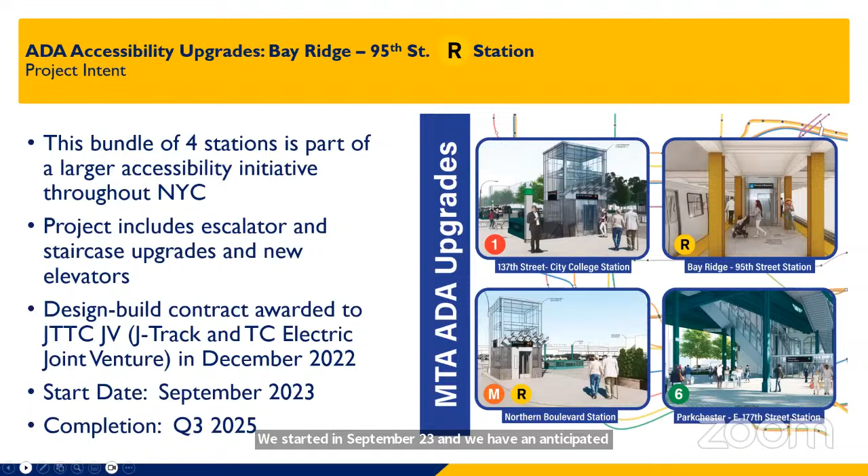The 95th Street R station is the final stop on the R line in Brooklyn. It's located at the intersection of 95th Street and 4th Avenue, an underground station with 1 island platform that has 2 tracks and staircases for access to and from the street.

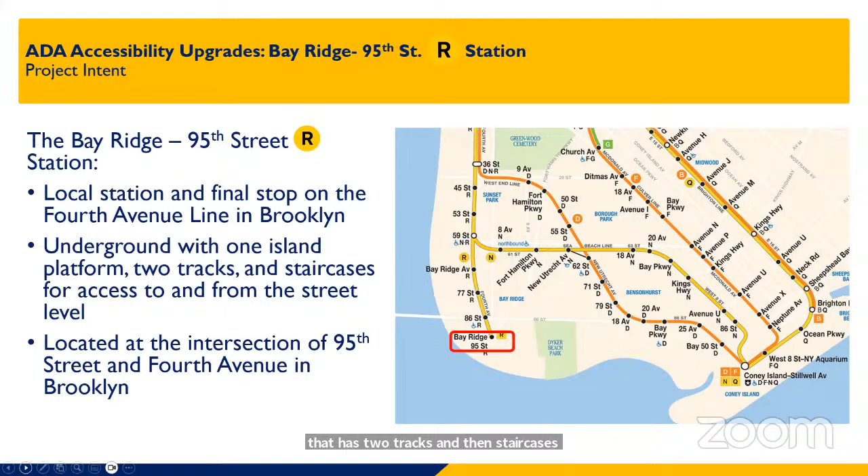The scope of the project: we are installing 2 elevators, one from the street to the mezzanine level, and one from the mezzanine level to the platform. There will be ADA compliant staircases with ADA compliant railings, an ADA compliant platform and boarding areas. We'll have an ADA compliant restroom for public use, and ADA compliant sidewalk ramps at the station entrance intersections. This is a rendering of what the elevator kiosk will look like on the street level.

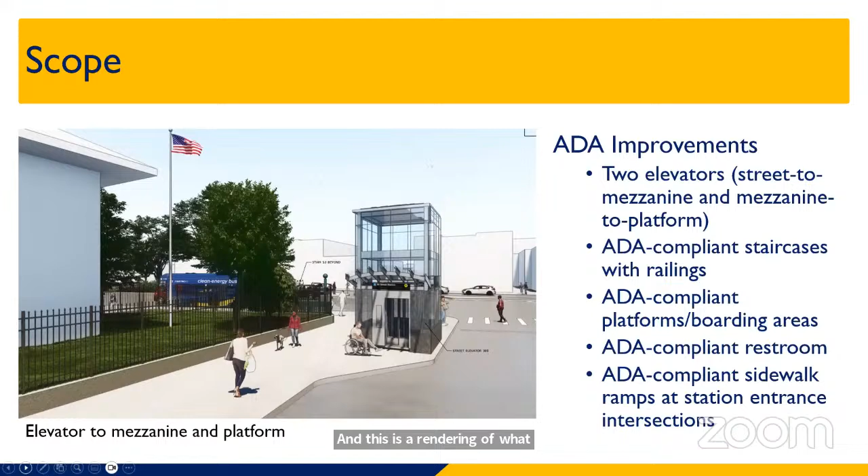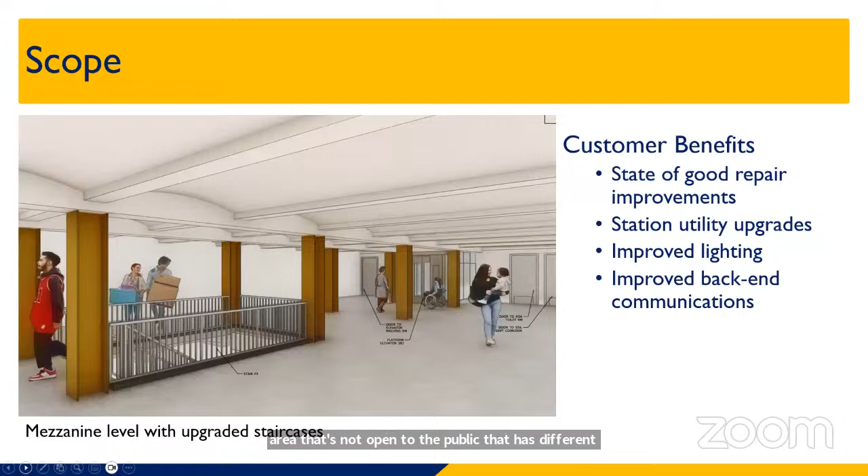Also, customer benefits that come with the project: we're making some state of good repair improvements, station utility upgrades, improved lighting, and improved back-end communications for signals. Underneath we have a pretty big area not open to the public that has different rooms for signals and communications, so we're doing some work back there while we're in the station.

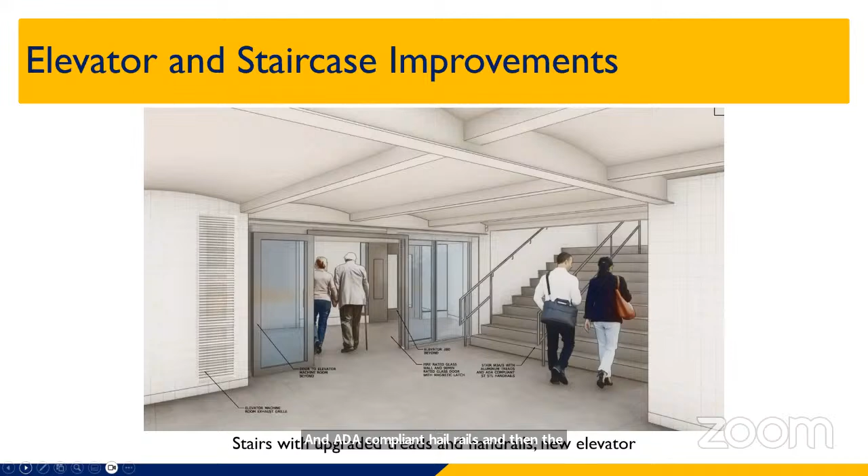The elevator and staircase improvements - the stairs will be upgraded with treads and ADA compliant handrails, along with the new elevator, and ADA compliant boarding areas with the warning panels and the rubbing boards.

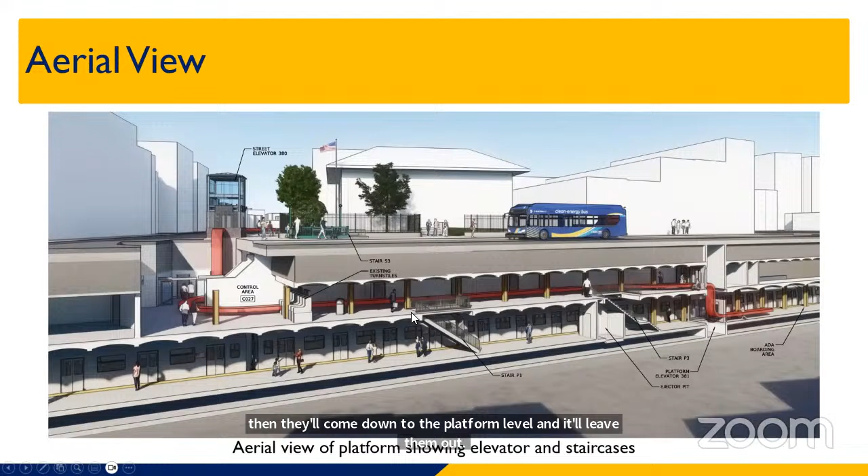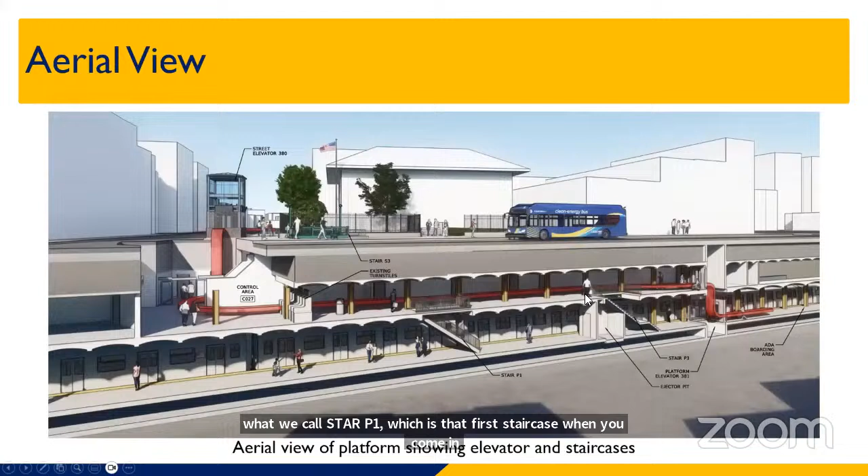We also did work on what we call stair P1, the first staircase when you come in through the fare control area and paid area down to the platform. And this is stair P3, the second staircase in the station that also leads down to the platform.

As we mentioned, we mobilized in September 2023, and some of our anticipated goals for completion are spring 2025 for the street to mezzanine elevator, and also spring 2025 for the mezzanine to platform elevator. We have the two staircases: the mezzanine to platform staircase was completed in May of this year and is open for use, and we're working on the street to mezzanine staircase, which we anticipate opening to service in early 2025.

There were some service impacts during the project. We had weekend service diversions where we ran shuttle buses to the closed stations. We also had other work going on in the R line, so we took advantage of that. We had staircase closures while we were working on those, and we have barricades in place for safety at street level, and signage up at the station.

We also had a temporary loss of parking while we did the work, and sidewalk and travel lane closures. We've been maintaining access to businesses during this time, and the dates of when we close the street and the parking are communicated in advance.

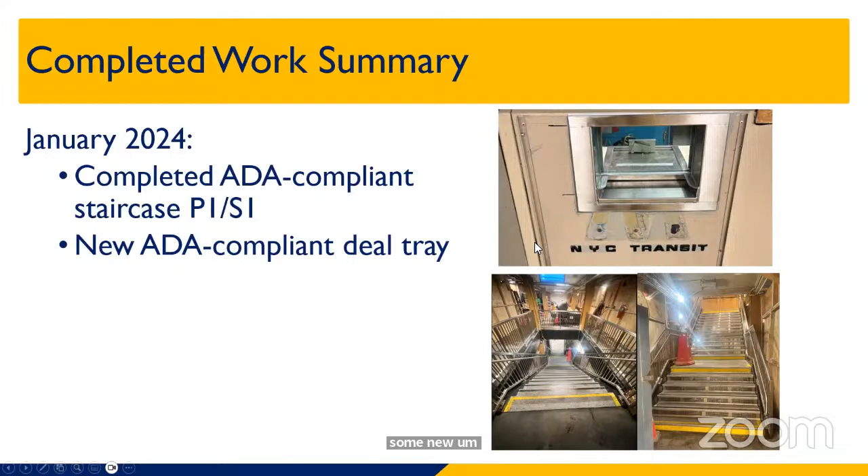So the completed work so far: in January 2024, we completed staircase P1, the first staircase in the fare control area down to the platform. We also have new ADA compliant deal tray for the token booth at the station.

April 2024, we completed the walls for the elevator machine rooms and the janitor's closet, and we're also working on the ADA compliant public restroom.

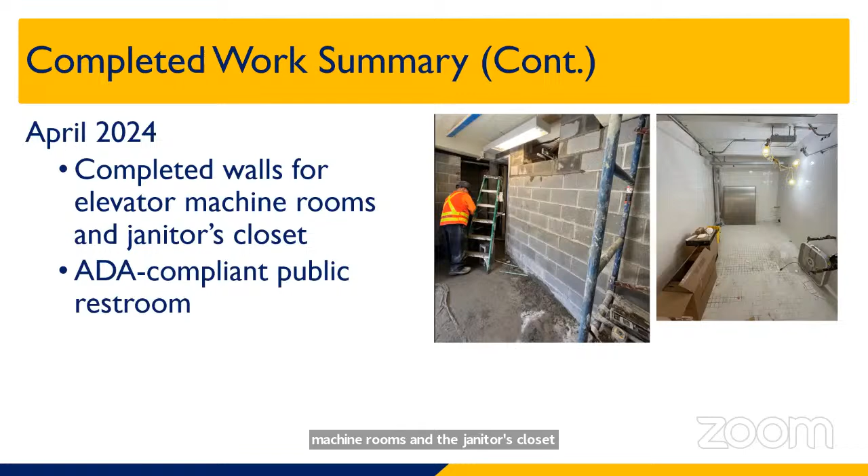In May 2024, we completed the ADA compliant staircase from the mezzanine to the platform.

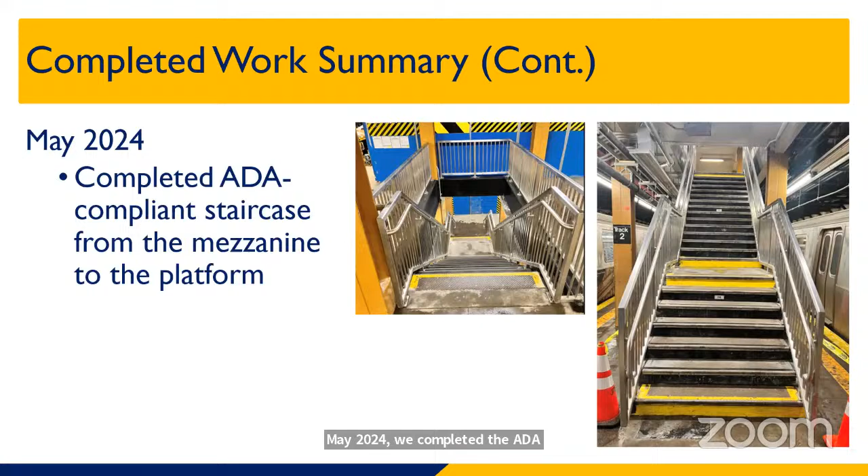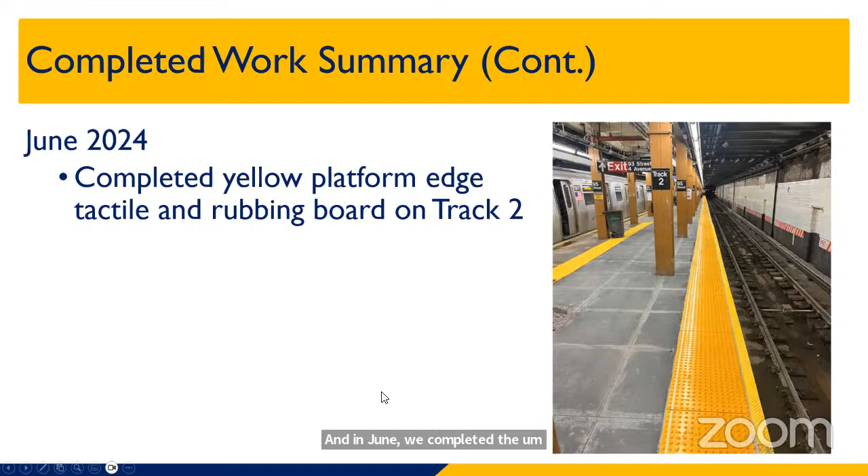In June, we completed the platform edge tactile and the rubbing board on what we call track 2. And this July, we completed the elevator shaft for what we call elevator 381, which is the elevator that will take people from the mezzanine to the platform level.

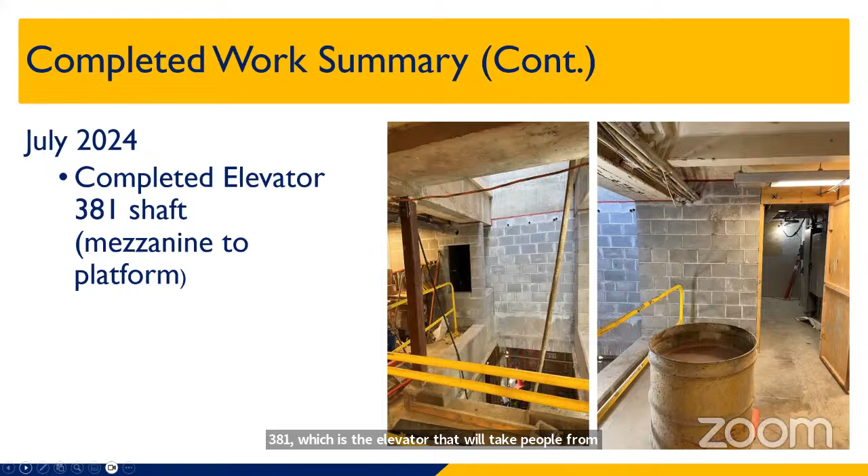So there's a picture there of the work that's been ongoing. In August, we completed the platform tactile edge and rubbing boards on track 1.

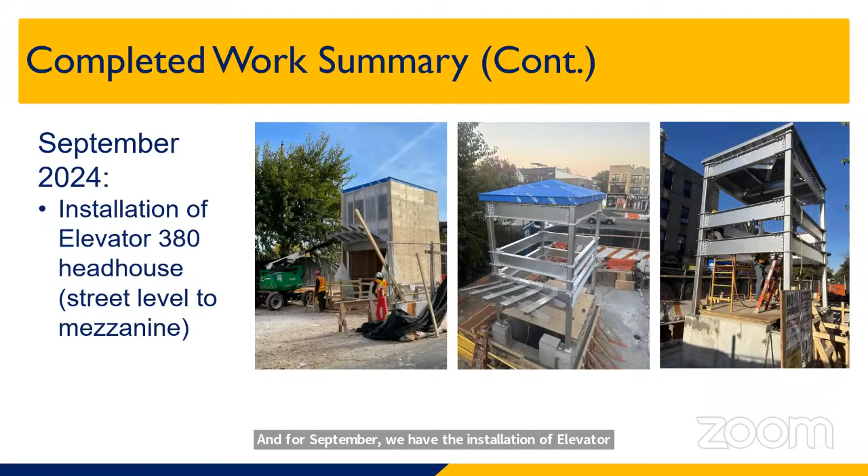And for September, we have the installation of elevator 380's head house, which is the street to mezzanine level elevator housing. We have some pretty good pictures there without a barricade in your way.

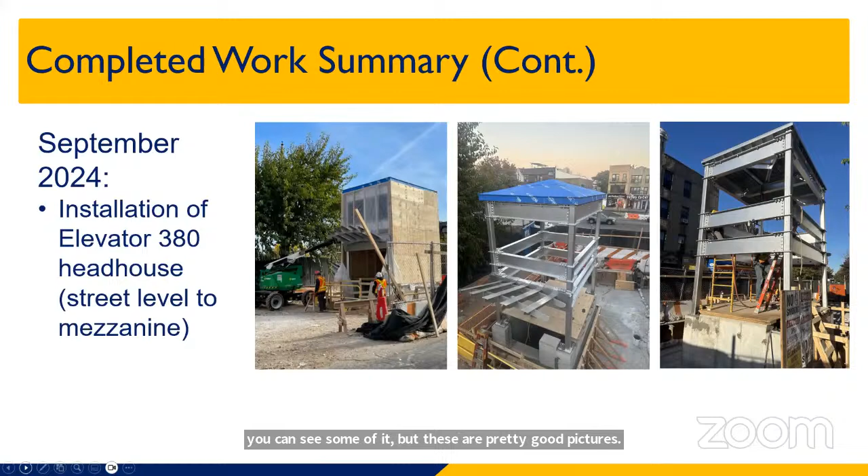We have ongoing work for both elevators, including installing the concrete for the roof slabs, the elevator shaft, demolition and restoration of the sidewalk area, installation of the platform safety railings, and building and installing the substructure. We'll also have final testing processes for both elevators, and we anticipate opening to service for the public in spring of 2025. We'll keep you posted as we get close to that date.

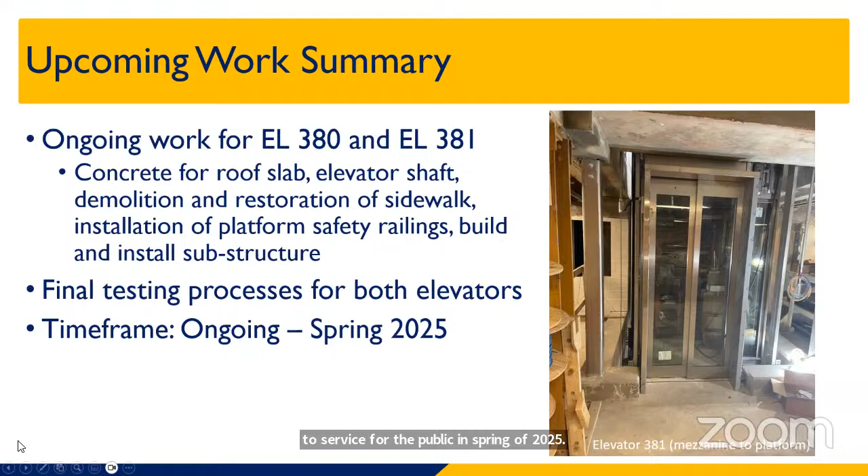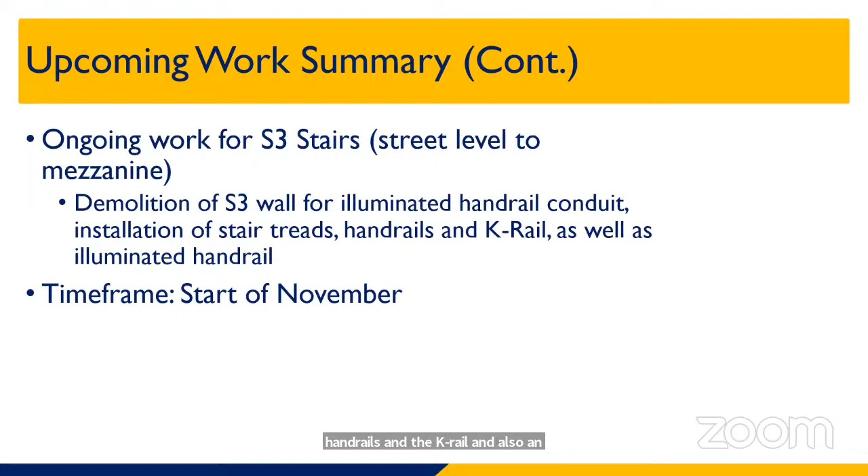We also have ongoing work for the street stair, that's stair S3. We had demolition of the walls for an illuminated handrail conduit, installation of stair treads, handrails, and the K-rail, and also an illuminated handrail. We're planning to start that work next month.

We also have general orders, which are the service diversions, communicated in advance with posters. This week on the overnights, we had work that required the R to be short lined, running between 95th Street and 59th Street, single tracking on the northbound track. Notification was put out for that. At 5 a.m. service is back for the morning, and we had signs posted for visibility for the nearby businesses.

We can take some questions and comments now. I'm happy to unshare my screen, or leave it up if somebody wants me to go back to any of the renderings or drawings.

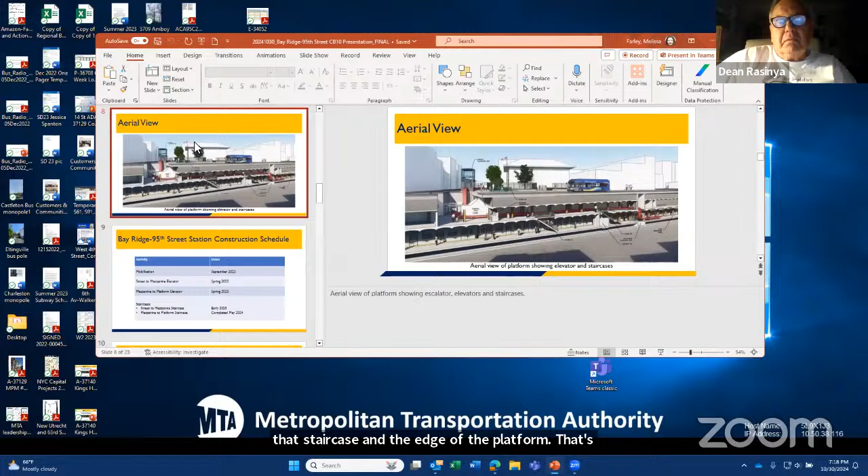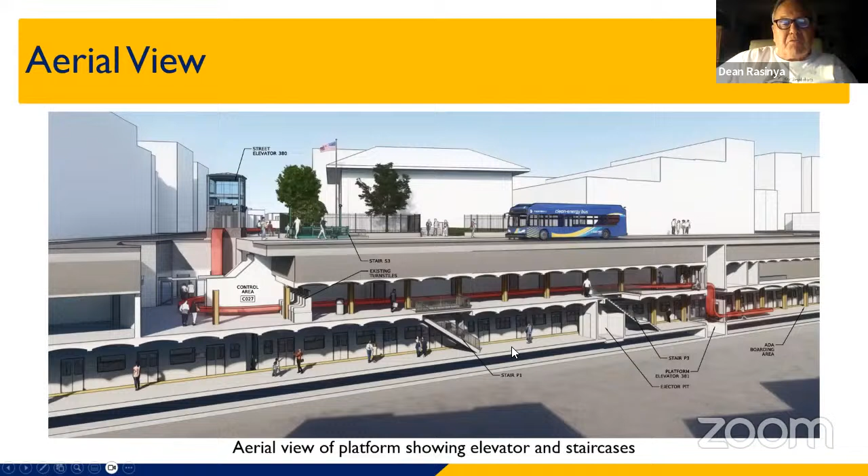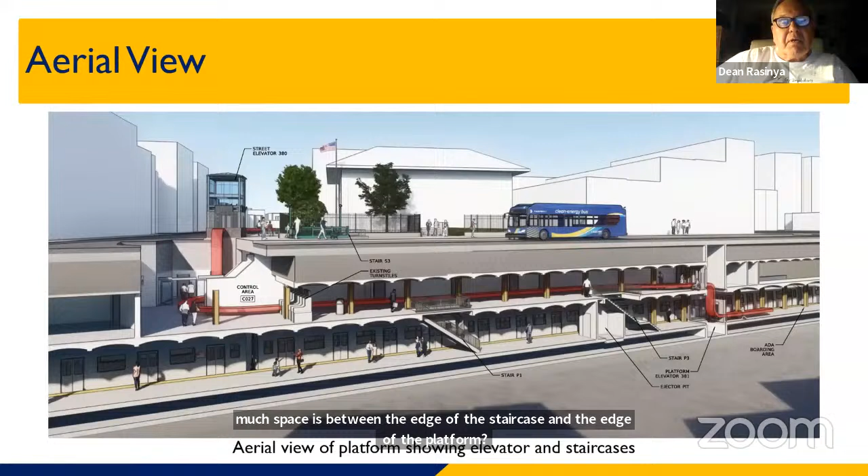Melissa, you're speaking but we can't hear you. Sorry, I was muted. Hassam, do you have that width? Excuse me, which area exactly are you talking about? I'm speaking about the platform where passengers have to traverse from one end to the other to get to the elevator. In doing that, they have to pass by a staircase - how much space is between the edge of the staircase and the edge of the platform? That's my first question. The minimum per the standards is 5 feet.

We're already providing it, it's available right there, this is what we have existing. One clarifying question - does the 5 feet include the yellow border rubber area, as you call it? Yes, including that. And second, from this chart, within the red line, I don't think we need to pass through a staircase, or am I reading this incorrectly?

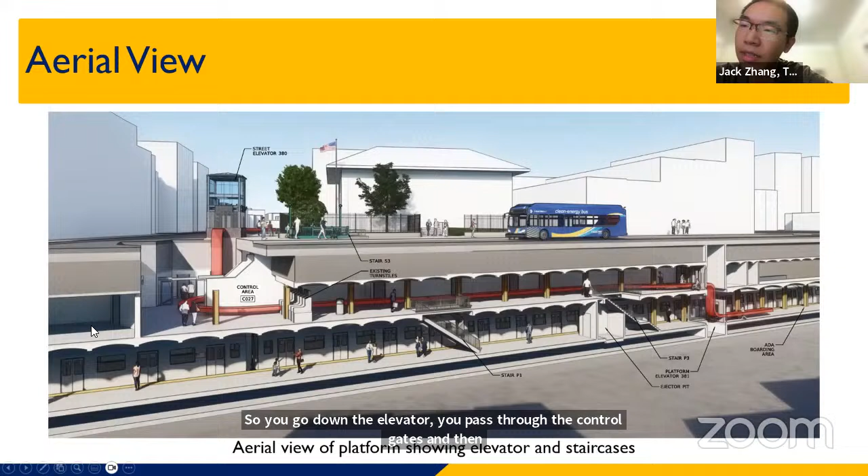So you go down the elevator, pass through the control gate, and within that platform area there's no staircase to pass through because we're on the mezzanine, then you go to the elevator and get down. Is that correct? At 95th Street, it's a middle island platform, so it's a little tight - this is the reason it's maybe tight from both sides, in the existing condition.

Yeah, I think you're correct Jack, that if it's somebody in a wheelchair or with a walker, when they're passing through the mezzanine level to the elevator and down, the pathway they would take would be to that ADA boarding area. We still have a 5-foot clearance, which is a typical ADA clearance, even up on the street - that's what DOT requires behind a shelter, that kind of thing. But if anybody is trying to board using the ADA elevator and that area, they would not be passing the staircase that way. They would board the train where they know they can get off and get on and get to the elevator.

But we can confirm the 5 feet. Okay, for Dean, you and Dean. My concern with that specifically, Melissa, is this.

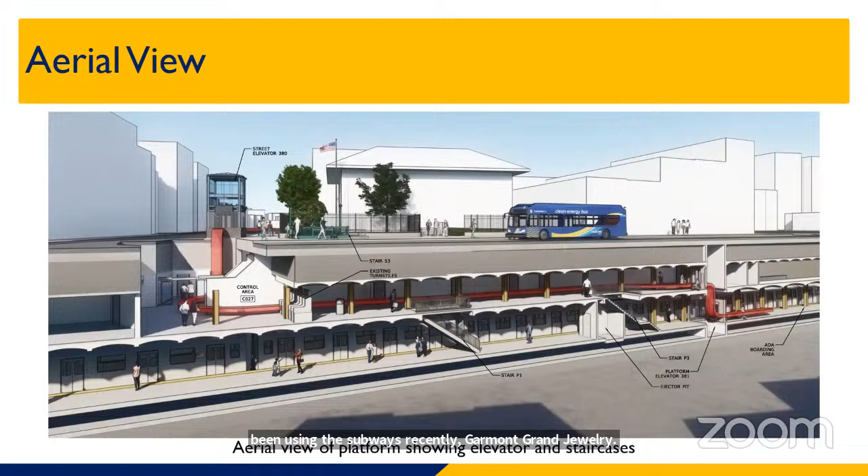I've been using the subways recently, Garmont Grand Jewelry, and I would say almost every staircase there's people that hang on the rail between the edge of the platform and the railing, which really narrows the amount of space a person has. I find even with myself, I wind up very close to the edge of the platform when I'm walking by there. So is there something we can work at preventing people from standing and hanging on those rails and forcing people out closer to the edge of the platform?

You know what, Dean, let me bring that back, because that's probably a system-wide concern. I understand what you're talking about, and as Hassam said, because this is an island platform, some of those island platforms are a little bit narrow. There's not much we could do with the platform because of the track, but I can ask about the staircase in general and those railings to try to keep people away from standing there and blocking that pathway.

He's asking all over the city. Even something as simple as having signs on there, do not stand, sit here, maybe that'll prevent some people from doing it. All right, yeah, sure, we'll bring that back and see if there's any initiatives that they might be interested in doing for that.

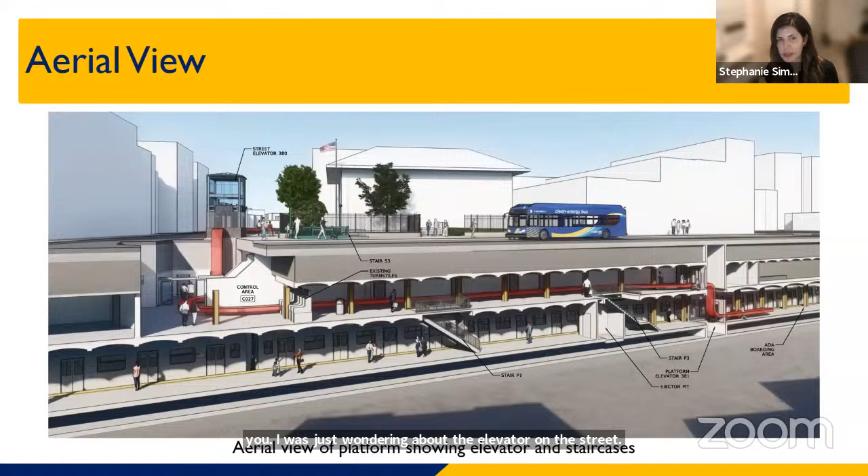All right, I see just one more hand. If there's anyone in the room that has a question, feel free to raise your hand in the meantime. Stephanie, we'll go to you. Thank you, I was just wondering about the elevator on the street side. By how many feet have you extended the sidewalk into the street in order to accommodate the elevator?

Going to toss that to you, Hassam. Approximately 10 feet out of the old curb. So the street itself then for cars has been reduced by 10... Yes, this was the agreement from the beginning. We are going to reduce the car lanes, and we got permission from DOT before we started the construction work, so we have to get this space to do our elevator.

Because we have to keep a passageway between the library curb and the new elevator. This is something that's not uncommon at other stations we have, due to the station configuration and where we could put the elevator. So we do understand that any loss of street space is a concern, but we hope the elevator is a plus too for everybody.

I was just wondering two things regarding that. Please remind me again, the entrance to the elevator on the street, and then in terms of visibility for cars that are driving — I believe that street goes towards 4th Avenue, east — when the car approaches, do they have visibility to the left? Does the elevator obscure drivers' visibility?

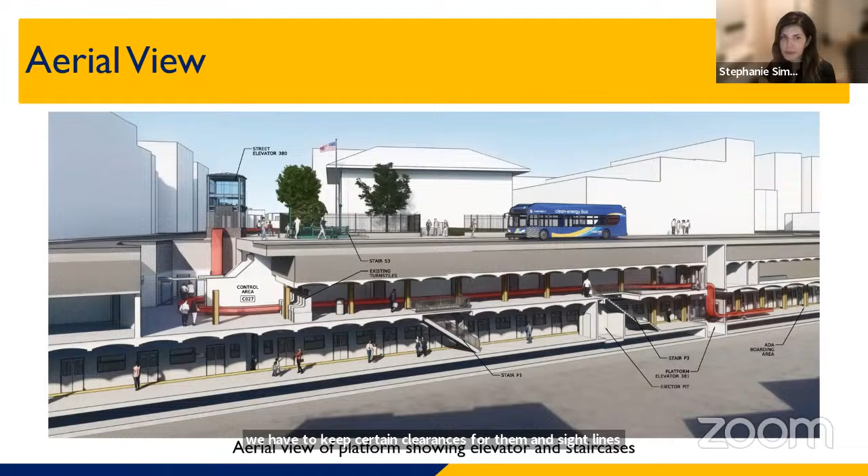It shouldn't right up to the corner because we have to plan this with DOT, so we have to keep certain clearances for them and sight lines. Okay, so we can check on that, what their requirements are.

Yes, Stephanie, there are standards for DOT for the vision for car drivers. We are already providing it. The elevator is a little bit back on the side of 95th Street, not on the side of 4th Avenue, to keep the traffic visible. The DOT cares about this kind of stuff. Okay, thank you very much. You're welcome.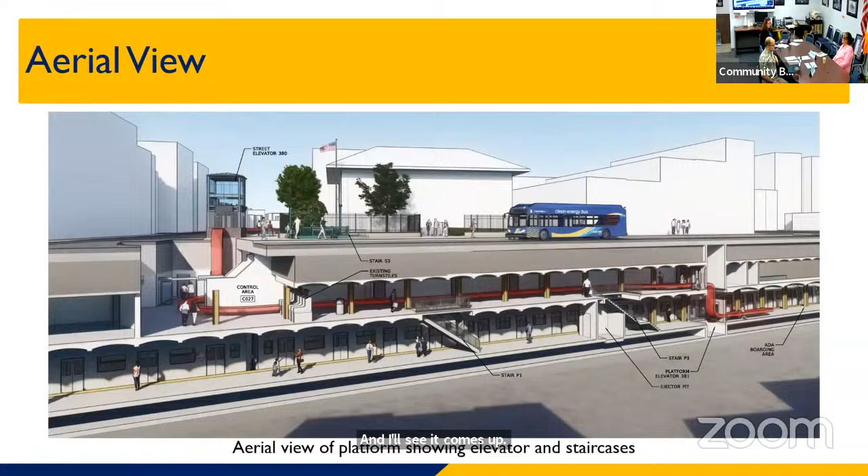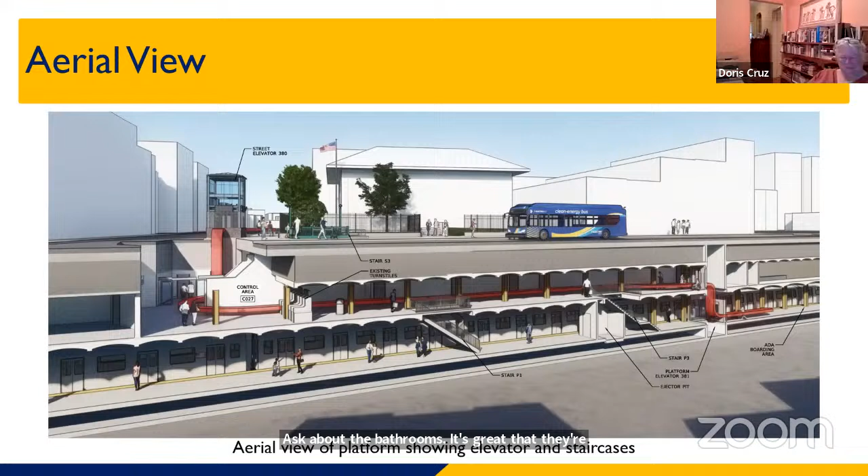Okay, any other questions, comments? I don't see it. Yeah, Dino Hatsis just raised his hand. All right, Dino? I just wanted to ask about the bathrooms. It's great that they're getting renovated and becoming ADA accessible. Are those going to be open 24/7, or what's going to be the deal with that? Just because bathrooms are so limited in general around the city, and especially within the MTA.

Yeah, let me check, I put in a request to check on that, so I have to get back to the board on that. I'm not sure if it's going to be something where they will keep that ADA compliant bathroom open all the time, or if that's something where the person would have to be let in by the customer service agent. So let me check on that. I'm sorry I don't have the answer on that tonight, but we'll get back to you on that. No worries, thank you.

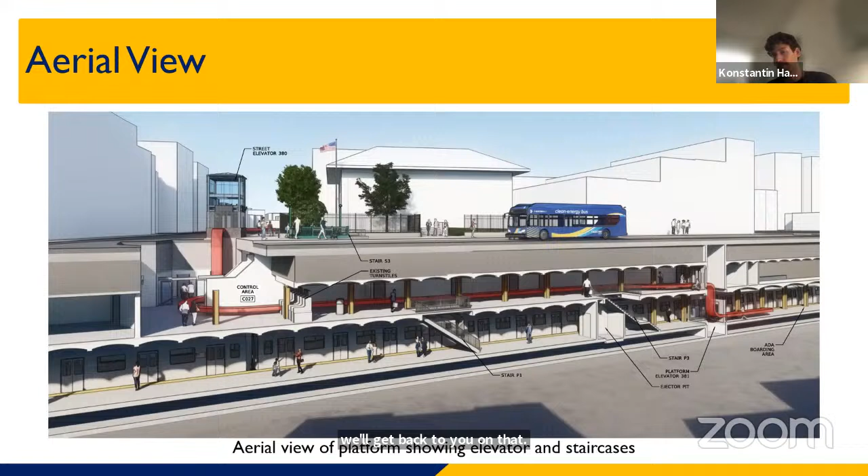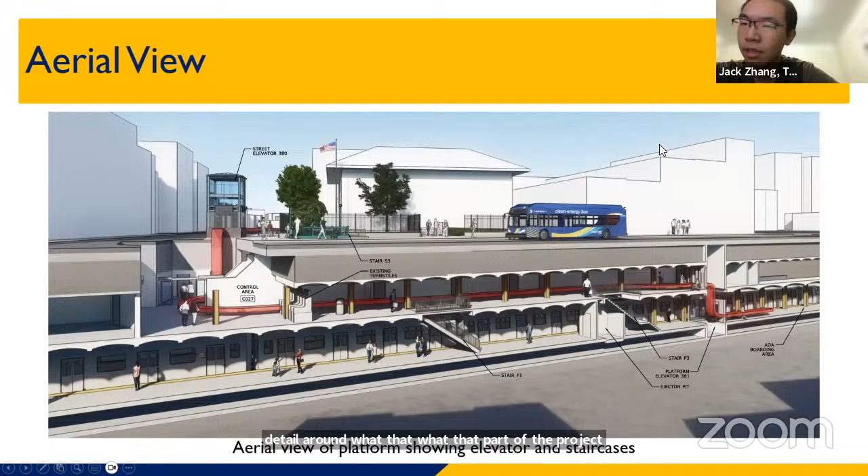Okay, I don't see any other hands, so I'll just drop in a question here. You mentioned that state of good repair changes or improvements will also be part of this project. Can you go into a little detail around what that part of the project looks like? I don't think we saw any of that called out in the slide. Assam, can you go through those details?

This station is not part of the state of good repair. Talking about 137th Street, this station is state of good repair, but this one just has ADA upgrading.

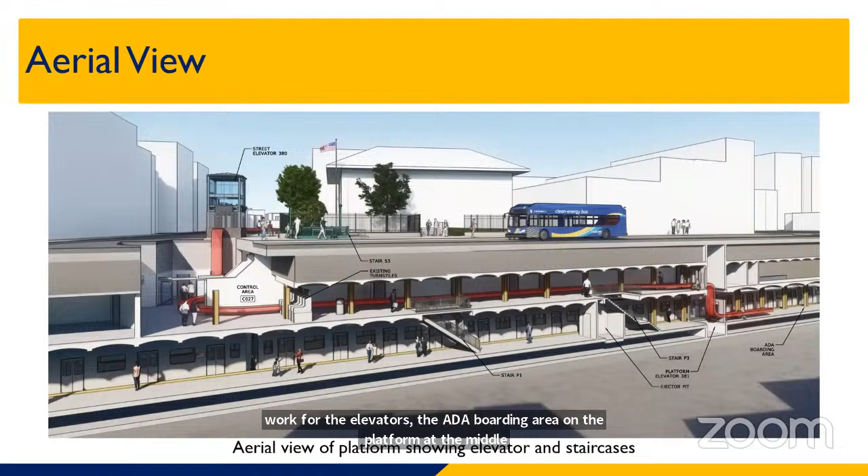We already finished the work for the elevators, the ADA boarding area on the platform at the middle, and we provided the staircases, but it's not state of good repair.

95th Street is not a state of good repair station. Okay, so we need to check that in the presentation, because we do have that in the presentation. So we'll get back to you, Jack, on that.

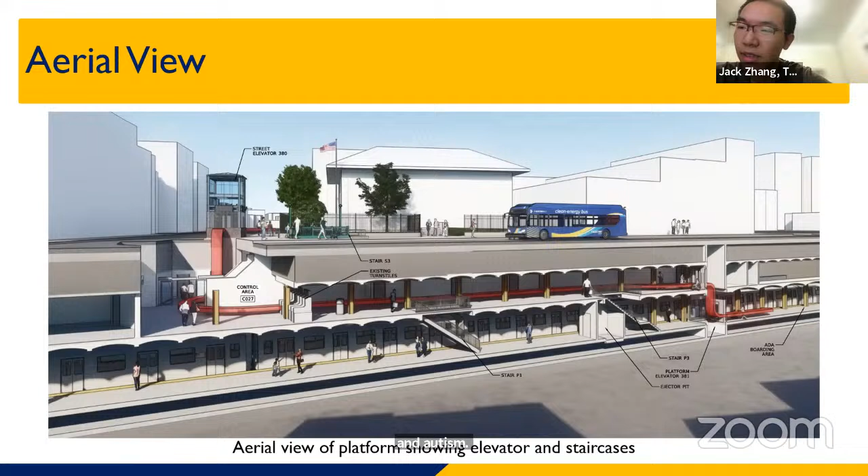I understand the presentation about the general project, but this is focused on 95th Street. So I wanted to know about any state of good repair changes that would be coming here. But it sounds like there's none.

Well, we can get back to you, Jack, on that if there's anything coming up for this station in the future, in the next capital project, because some of that would be what we call component work that they would do. So I can check that for you.

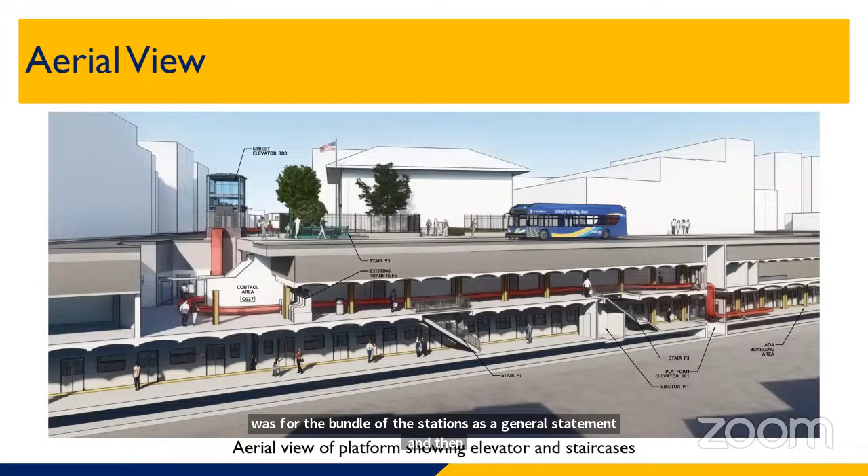I apologize, we didn't specify which was for the bundle of stations as a whole, as a general statement, and then specifically here. So thanks for pointing that out to us. We appreciate it. But I'll get back to you if anything else is coming for 95th Street.

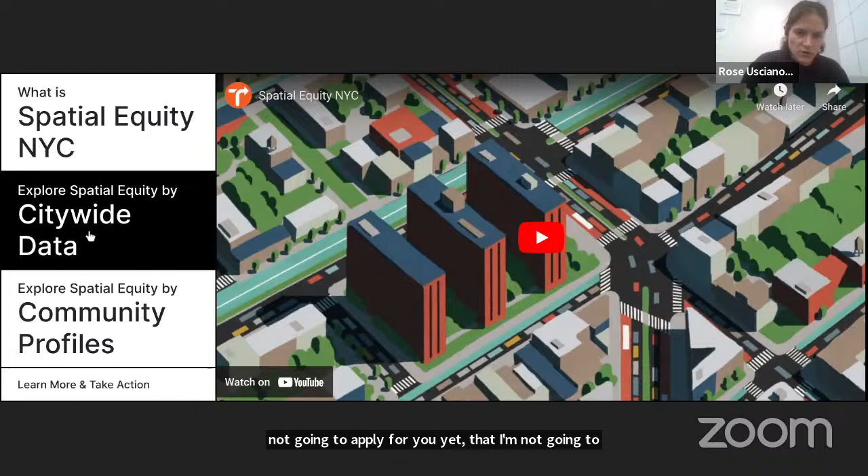So this is Spatial Equity NYC. There's a little introductory video right here that I'm not going to show you now, but you're welcome to look at that. If you want to play around with the site, it's definitely one that I recommend. It'll give you a lot of data.

So I think that what would be of most interest to you is to explore it by community profiles, and you can literally just click on Community Board 10. So I'm going to do that. And you can look at a number of different types of information.

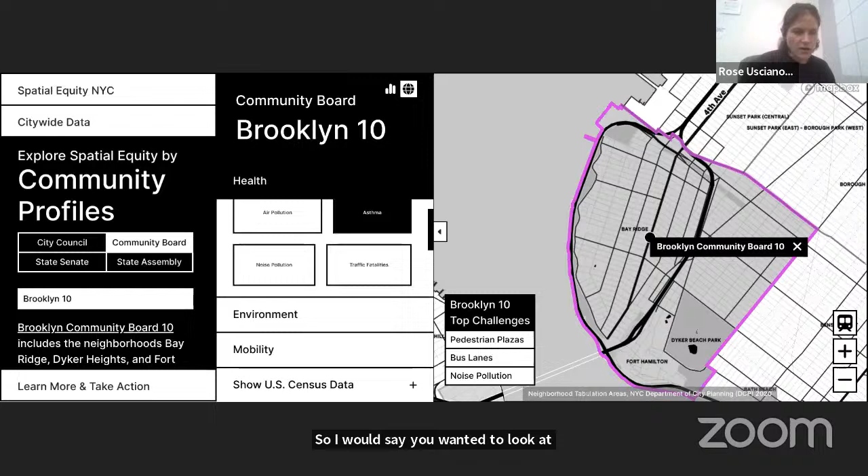So let's say you wanted to look at asthma rates, which I know compared with other neighborhoods of New York City isn't the biggest problem here, but just as an example: in CB10, there were 45.5 asthma-related child emergency department visits per 10,000 residents. That means CB10 ranks 50th out of 59 districts, with the top district being the worst and the 59th being the best. So in CB10, asthma rates aren't too bad.

But it'll also list what are the biggest challenges. So if you wanted to look at something like pedestrian plazas, it'll show you that no residents in CB10 are within walking distance of a pedestrian plaza.

And if you wanted to look at noise pollution, it'll show you that the number one ranking community board has the most noise pollution from the street, and CB10 ranks 7. So that's not a ranking you probably want to have, and that's something that needs to be addressed—although I already know it's something you've been advocating about a lot.

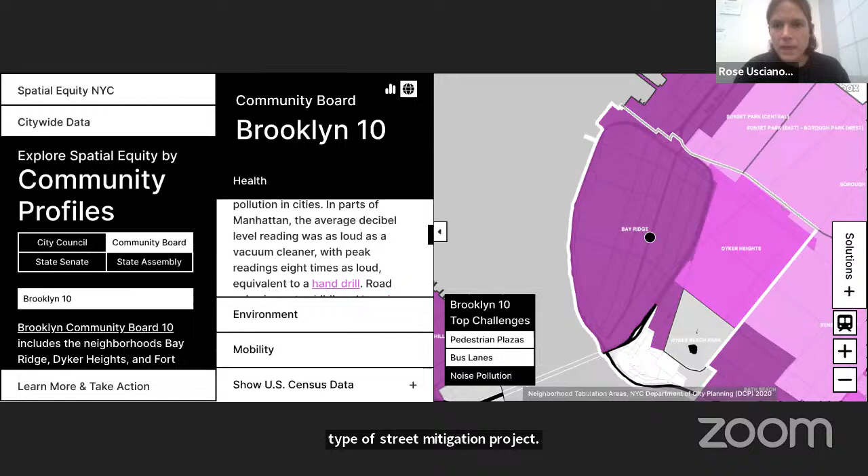But either way, there is a ton of information, a ton of digging that you can do on the spatial equity website. So I can't go into it further one-on-one, but I definitely encourage you all to check it out privately.

Okay, let me go back to - okay, can you see my presentation again? Yeah, okay perfect. So moving onwards.

Okay, this is a website that was put out by the Mayor's Office of Climate and Environmental Justice. And it's a website that doesn't necessarily show you street level data directly, but a lot of what it does show you is indirectly impacted by street design. It's also just a really great tool to get information about your streets. So I'm just going to show you quickly.

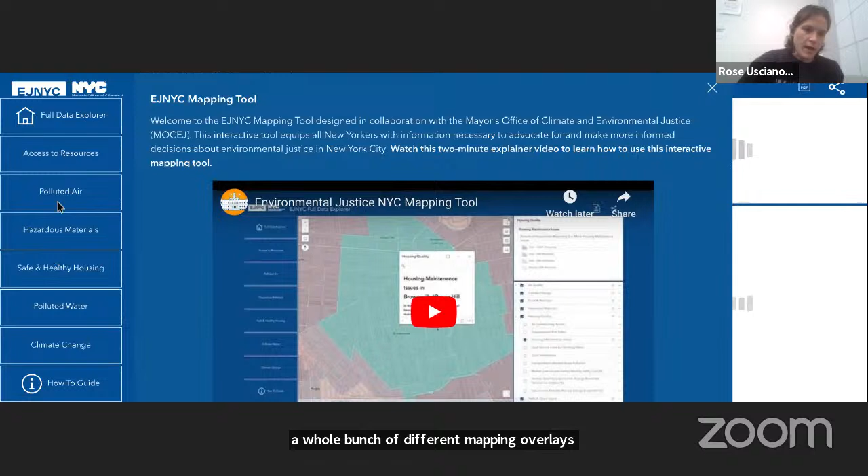So basically, this goes into everything related to environmental justice in New York City, and there are a whole bunch of different mapping overlays that you can go into. So, for example, if you wanted to look at air pollution, you would go to the tab for air pollution, and it'll give you information about air pollution by census tract. So it gives you the information at a really detailed level - you can see it by the neighborhood level, and even by areas smaller than the neighborhood level.

So you get a really detailed look at where air pollution is a problem, where it isn't, and different types of air pollution. You can look at everything from carbon to ozone to PM 2.5, to air pollution from bus depots. So it'll show you where different bus depots are, where power plants are - there is so much information here. It'll give you this by census tract across the entire city.

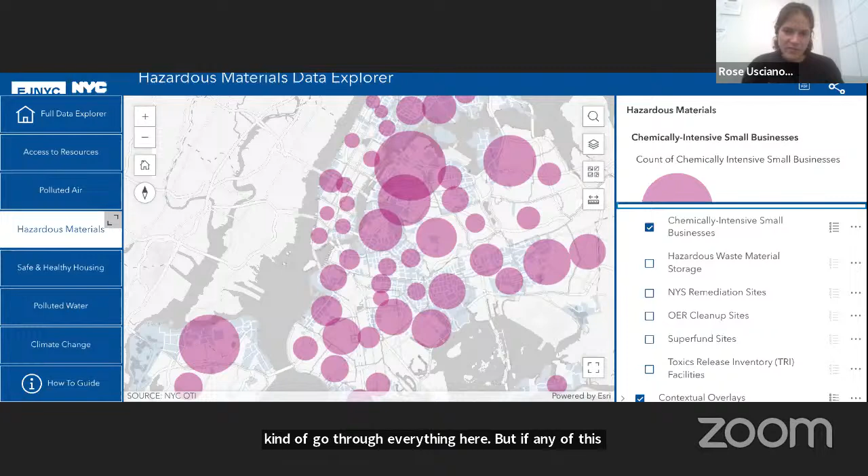And there's just so much information to go through that it would take me over an hour to kind of go through everything here. But if any of this is of interest to you, then I definitely encourage you to check out this website.

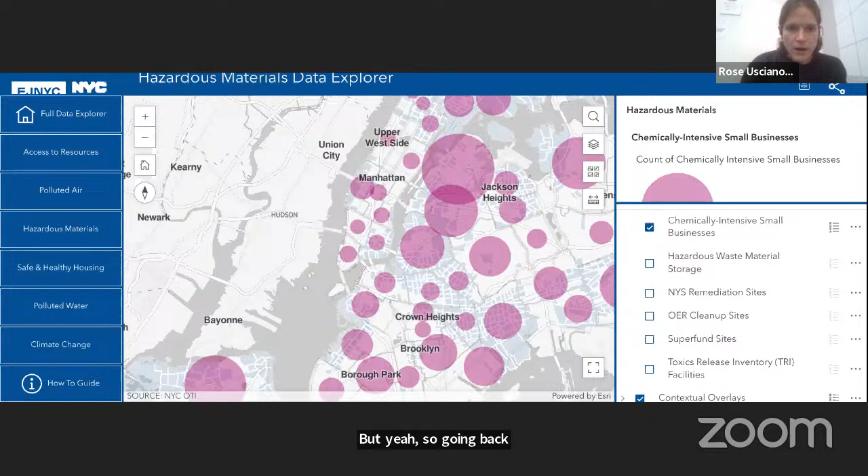But yeah, so going back to the presentation. Okay, are you guys seeing my presentation again? We do. Okay, and I apologize for all the information - I know it's a lot, but this presentation will be shared with all of you, and so the tools will be made available to all of you.

Okay, so moving on. This is a website that was actually launched very recently, and I was at a meeting about it last week - I think it was last week when the Parks Department announced it in Staten Island. But either way, it's something that was developed by the New York City Parks Department, and they call it the Vital Parks Explorer. It basically allows you to look at different parks in your community and how they're doing on a bunch of different levels.

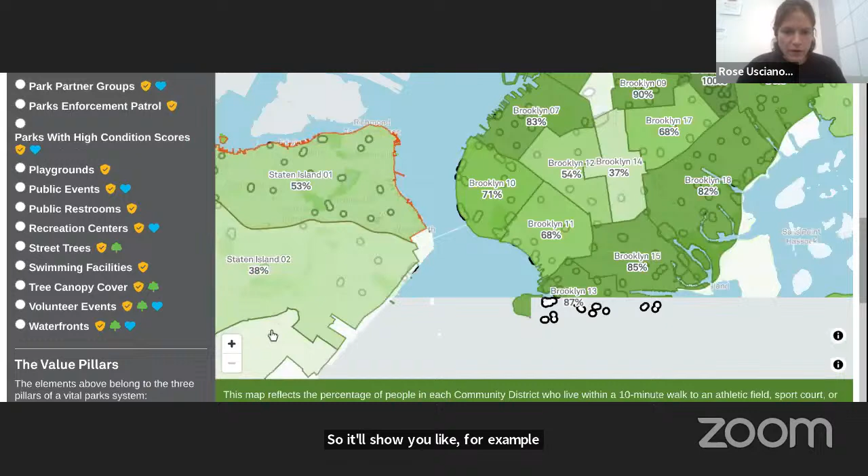So it'll show you, for example, we move down to Community Board 10 and 1. This is like a report when it comes to what they call the elements of a vital park. So all of these boxes - community gardens, greenways, dog runs, et cetera - that's what the Parks Department considers vital park elements. It'll show you how CB10 ranks compared to the city in all of these elements. And most of them are pretty good, except for community gardens - there's a real lack of community gardens in Community Board 10.

I don't even know what a forever wild natural area is, to be honest, but I'm guessing that it's like a state park or something. Either way, you can also see that there's no access to nature centers or hiking trails. Honestly, how many hiking trails are even in New York City? Not that many, so I wouldn't feel too bad about that. But either way, you can see a lot of data here about where Community Board 10 ranks overall.

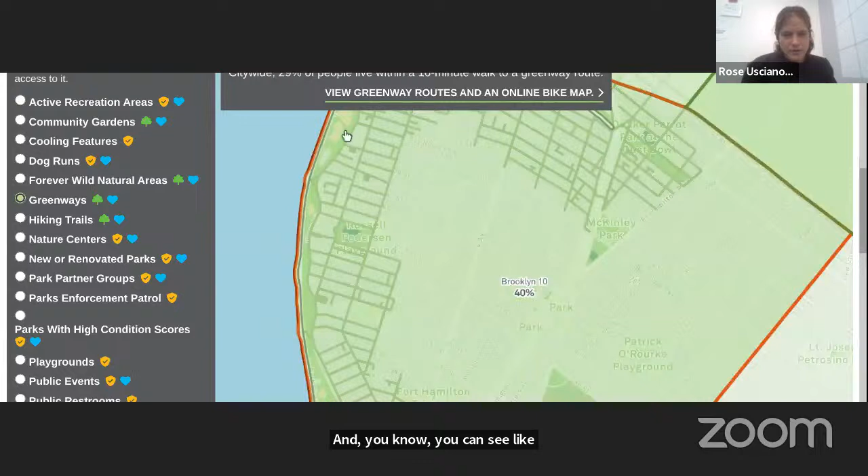So let me click on like greenways, and you can see the greenways. So obviously, the waterfront greenway is going to be highlighted.

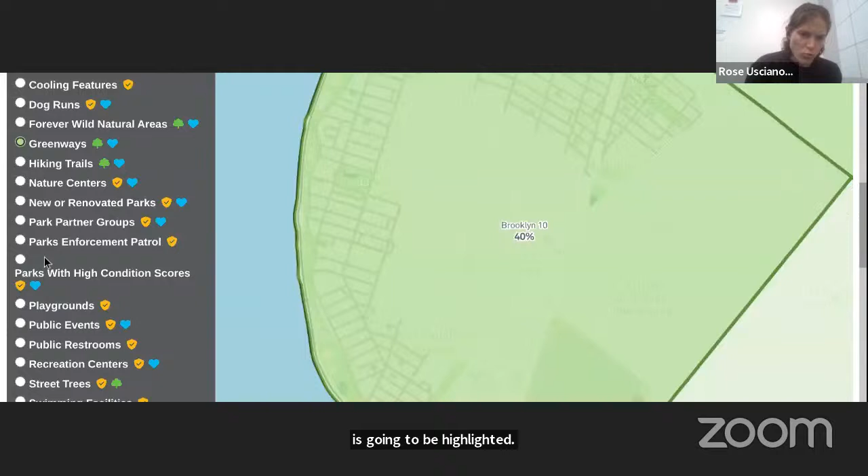And then if you want to look at which parks have enforcement patrol, then you can click on this. It's being a bit wonky on my computer, but basically it'll show you which parks have all of these different elements. So if you're looking for parks with a dog run, or that have patrols, or that have water fountains, or whatnot, it'll help you find it on that website.

And you can also, if you see that there's a park that really needs something and it doesn't have it, then maybe you'll shed new light on the deficits that different parks in your community have, and you'll know what you need to advocate for.

So moving on - sorry, I have to keep switching between tabs. Okay, so I am almost finished. The Vision Zero View is something that some of you might be familiar with. This is a website put together by the Department of Transportation, and it's very simple.

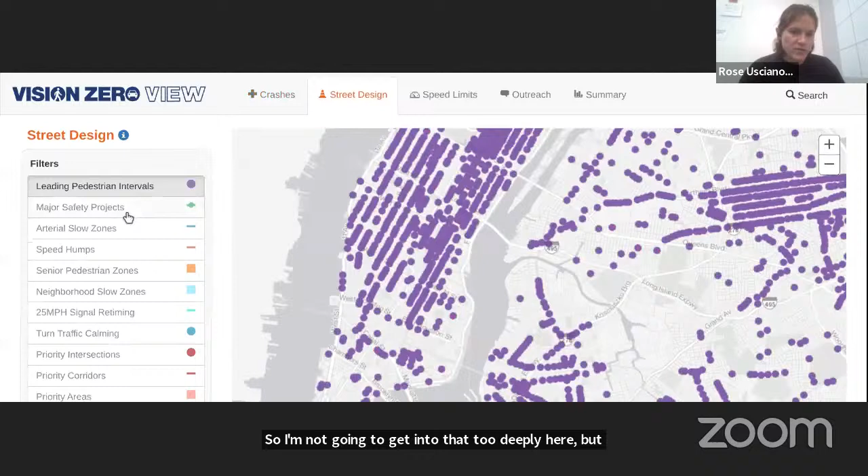But it also shows you all of these different tools that the DOT uses to kind of try to make our streets safer, and it'll show you where those tools have been implemented. This map is supposed to be updated regularly, but I'm not sure how often the DOT actually updates it, so unfortunately I can't speak to that.

But it'll show you where all the leading pedestrian intervals in the city are. So if you find an intersection and say, oh, this intersection really needs it, then you can find out whether or not it has an LPI. A leading pedestrian interval is just maybe a 10-second head start at a crosswalk where traffic is stopped for everyone except pedestrians, so pedestrians get a head start before cars begin turning. This will show you where those treatments have been implemented and which intersections still need them.

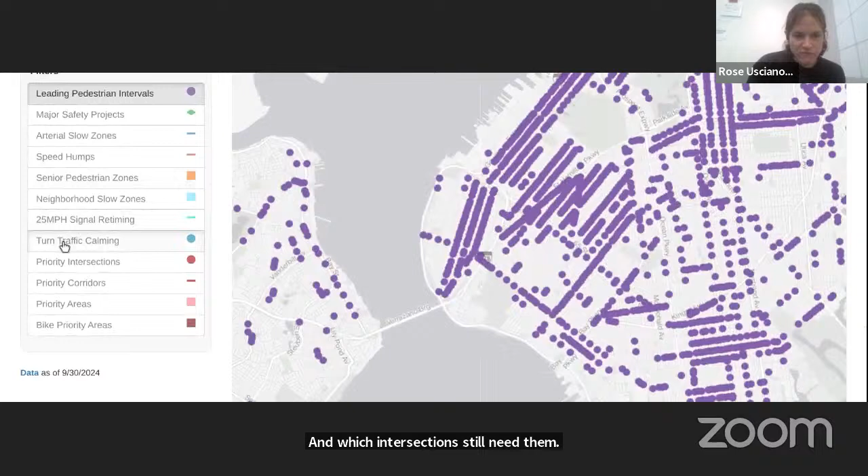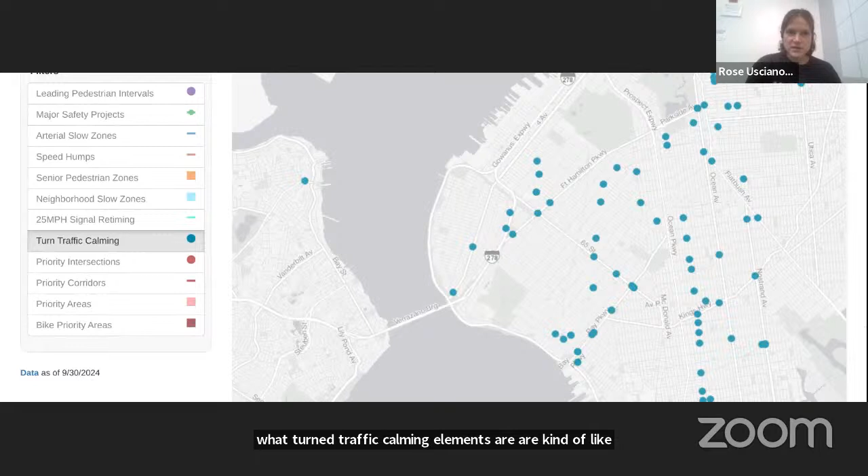It'll show you where turn traffic calming treatments have been applied, and honestly there haven't been too many of them - the city needs way more. Turn traffic calming elements are kind of like those strips you'll see at an intersection that force cars to turn at a 90-degree angle, which forces them to slow down. So these are all the intersections that have been given that treatment. Honestly, I think the city really needs to ramp up implementation of turn calming treatments.

I would have liked the city to add things like daylighting to this map. I think it would be really great to see which intersections have been daylit and which ones haven't, but either way, there are other things you can see, like where treatments have been added and where they have not using this map. That's a good way to see what the city has done on your streets to make them safer. And finally, moving on.

Okay, so this should be the last one, and this is also a very simple website, but it's one that I actually love. Some of you may know about it, some of you may not. Basically, this will show you the width of every sidewalk in New York City.